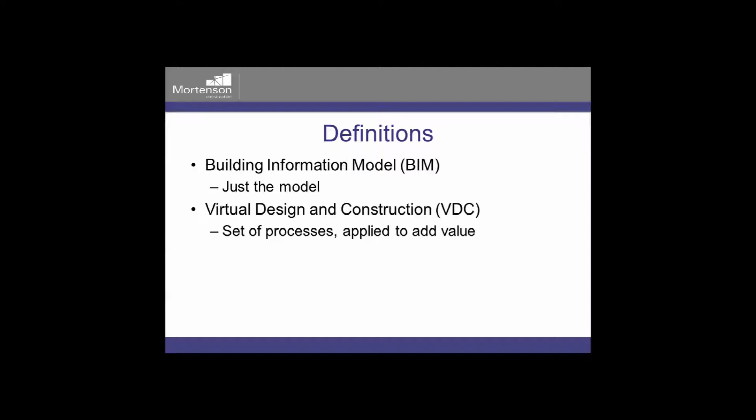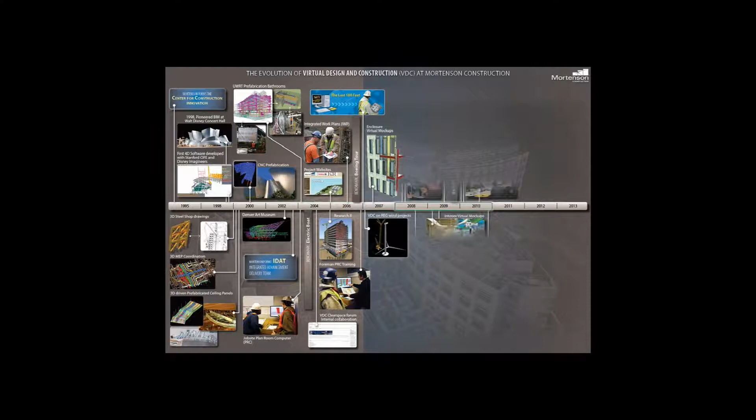Go ahead, Chris. It's Chris here. Just a brief intro here. You'll see as the slide builds here a timeline of Mortenson's processes related to virtual design and construction over the years. And it's really our philosophy, our approach, that the virtual design and construction processes utilize BIMs, building information models, but the value comes from the process, not necessarily the models themselves. The models are just a means to the end.

Here's a little background on some experience over time where we're trying to grow both our projects' utilization of virtual design and construction, and at the same time build the expertise and embed that expertise within our folks' skill sets. Here's a little more history, if you will, or some reference or guideposts as far as Mortenson's progression through virtual design and construction.

The area we want to spend most of our time on today is really acknowledging the difference between, quote, using BIM on a project and differentiating those various uses that apply value through virtual design and construction. That's that acronym again. This reference graphic here is from the Building Smart Alliance, and this was part of a project that Mortenson was a contributor on. Among others, there was a consortium of folks representing architecture, engineering, contractor, and the owner-operator areas of our industry. And this is really the framework that we use to create a frame of reference for the various uses.

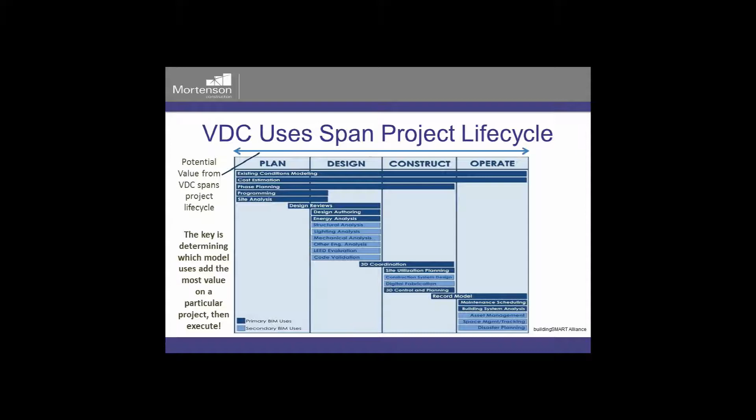The great thing about this framework really is that it provides some consistent nomenclature, and beyond just doing BIM. That was really a transition, and it's a paradigm shift here within the industry too, that as our firms in the AEC industry and then the owner, definitely the paying customer, get more versed in expectations that we're no longer just, quote, doing BIM.

An important piece of this is, like Mark mentioned, how all the parties contribute or inhibit VDC use to add value on the project. The largest way we believe to improve this is to acknowledge potential downstream uses for BIMs, for the building information models, early in the project.

So Mortenson's intent is to support the design and owner team to best deliver the value, and not necessarily be interpreted as, we're trying to define what the owner's needs ought to be. We're here to participate there and contribute and make sure that those are enabled. Likewise, with the design team, is it our intent to say this is how the designer ought to be using it? The point here is there's a dialogue and the framework really across the whole life cycle.

Okay, so when you're talking about quality in construction and specifically how Mortenson's organized, why VDC to quality? So essentially what we're trying to do with quality is we definitely have to control our cost. We have to mitigate our risk. It's all about customer satisfaction and repeat business. So we'll go on with the next slide here.

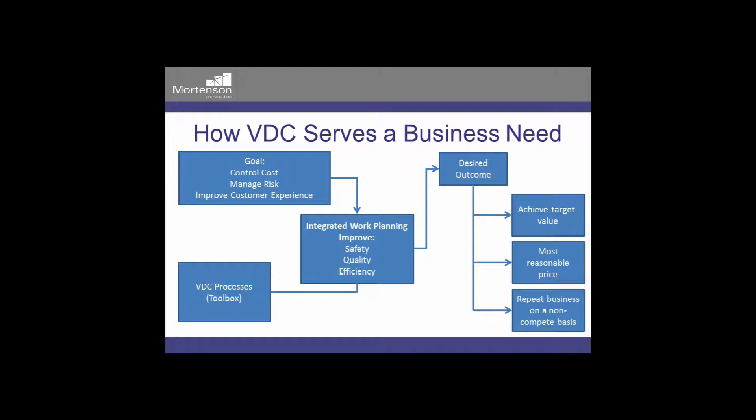So when we say we're going to do BIM, we're not just going to go out and model every job. We're going to identify what the specific needs are for the customer and the success of that project and go from there. Okay? So ineffective planning. I always enjoyed these types of photos.

Yeah, go ahead. Sorry, this is Matt. We just had a question before we get started with that. Mike McVitie was wondering, who within your team at Mortenson maintains the updated BIM for transference at the end to the owner for operational use?

As far as a person, it could vary within a team, but typically each project team has as a part of the team an integrated construction coordinator that is one of our professionals alongside the superintendent, project engineers, project manager, and so forth. But in a lot of cases, even that responsibility is a little blended. I've seen project managers take a leadership role there.

In some cases, right from the field, the superintendent is really the one that's the interface of that transition. Yeah, we typically have a lot of people that are utilizing the model throughout construction, but in terms of ownership, a champion, if you will, throughout the duration of a project, it's our integrated construction coordinators.

And then they may actually be taken off a project in the 70 to 80% range, and then come back on when we're doing transition to sustainable operations, when we're talking about delivering the model and the other closeout deliverables. The customer might get back into it just to make sure that that process is as smooth as it can possibly be. Does that answer the question out there, I hope?

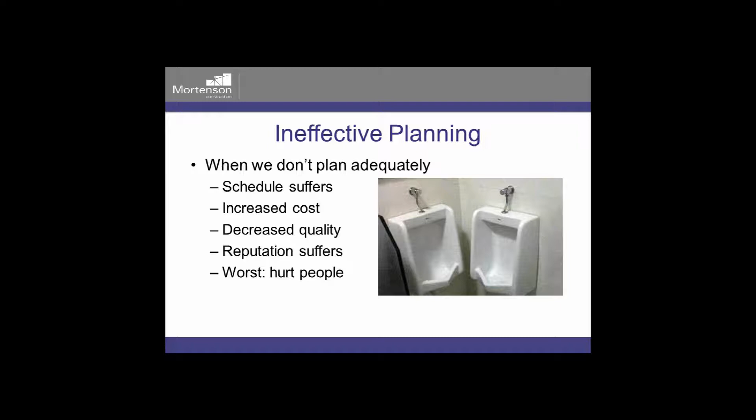Okay. So essentially, like I said, our strategy is developed around integrated planning, and integrated meaning it's not just us. We're involving all of our partners, from subcontractors and vendors to the design partners, even customers. So when we don't do that, of course, the schedule can suffer. We can have increased costs, decreased quality and reputation, and the worst case scenario is when we do ineffective planning, somebody gets hurt in the process, which we absolutely do not want.

Okay, so VDC is helping us be better planners. This is actually a photograph of one of our job site trailers. That's our project manager up there, cruising through the model. We're utilizing a smart board, and you've got our project superintendent there on the right and our quality manager on the left. And up in the upper left-hand corner is our ICC coordinator, then our two other project engineers. So this is an internal communication tool that assists us in developing better integrated work plans.

So of course you can see elements of the improved planning, increasing the predictability. We want to know what's going to happen, when, internally and externally, communication to the outside world, communication to the customers, especially when we're involving either adjacent spaces or disruption avoidance with occupied spaces. We need to know what's going on there, and managing those expectations. And as you'll see in the following slides, some elements of how we can utilize VDC and leverage it to make that communication clear.

Again, beginning with the end in mind, establish a plan, and control the perceptions. Value added. So we're not going to do something just for the sake of doing it. We're going to think in terms of the customer, what their desires are at the end, and utilize that. Okay. So how do we do that? Yeah, this is one of the most important parts. What we'll see frequently is so many things to pursue on a project, and so many things are important, and there's a natural tendency just to dive in and start creating content, the feeling of let's just start putting work into place.

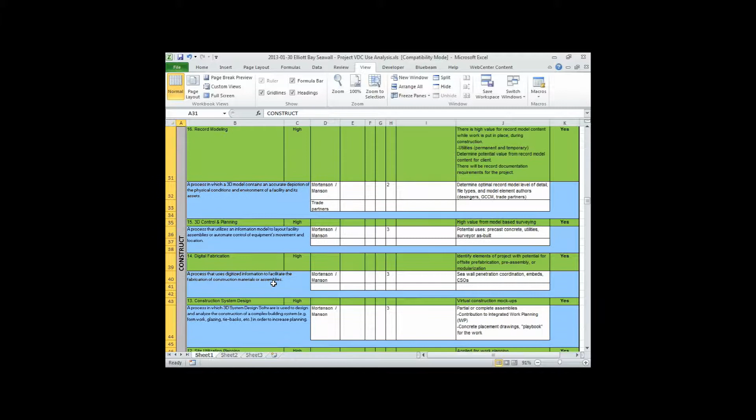Here's an example of one of the Building Smart Alliance templates. If the folks on the call are not familiar with it, I definitely encourage this. This is open source information from that consortium we were talking about that we think gives the best shot at leveraging common nomenclature for various uses and aligning a particular project's needs with these uses. So all the way from the operate stage, from construct, design, and plan, really beginning with the end in mind, what would the client, the most downstream customer, achieve value from?

Okay. And this is a really great tool, not just for us, but it could be a really great tool for specification writers when we're thinking in terms of interface with customers and trying to interpret what they want in the end, and trying to outline that so we can set the expectations up early in the design phase and get those written into the specifications.

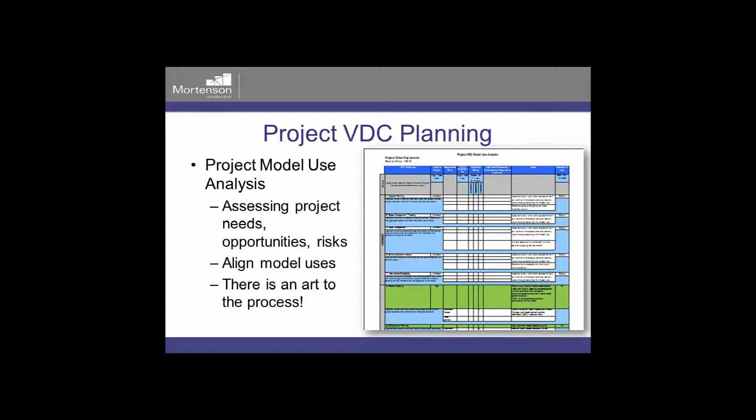The earlier the better, as we'll find out here in a minute. The next step after you've established these potential uses really is creating a plan that the team can utilize to agree on and go execute.

So there's definitely an element of model management between the various firms, designers, trade partners, the GC, CM. And the key thing that's happening here is we're establishing roles and responsibilities, schedules, milestones, all of the intricacies that have to do with model handoff and right of reliance. Those sorts of things ought to be determined and then established and documented within a plan.

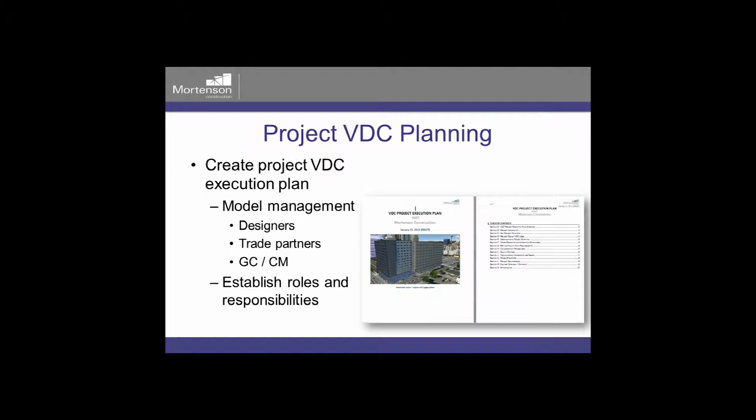Yeah, so it needs to be very clear on who's going to make the model, how that's going to be handed off, who's going to manage the subcontractors with their input, how we're going to do clash detection, how that's going to be delivered back to the architects, who's as-builting, and who's delivering the final deliverable back to the customer. So what this document does is basically, for all the parties involved, makes that crystal clear from day one. So we're not having these discussions as we go through on who's doing what.

Okay, integrated planning. So what you're looking at here is a phase plan. This is a structural phase plan for a project that we did in Billings. So this is typically how, if you guys have ever heard the term the last 100 feet, when we start to take this information from the model and actually deliver it to the foreman and the craft out on site, we translate this information down to, this is a PDF,

and it was actually an active PDF where we had a movie in there that showed our construction sequence, but it was very critical because we had some very critical leave-out elements to be able to get mechanical equipment into the building. So we utilize this format to actually communicate that. So we're also able to print this out in an 11 by 17 format that the foreman can take out and keep in his gang box so he or she understands what's going on and can communicate that to the craft on a daily basis.

So we cover safety and quality and, of course, sequence. And we utilize this information. This is extracted right out of the model. And I think we utilize Synchro along with this structural model so we can show the sequence of how this is going up. And like I said, we're able to embed this into a PDF element so we can email this to everyone and they can actually play it at their own leisure and see what was going on here. Other elements typically in here: who the players are, their phone numbers, other related plans associated with this, and that's it.

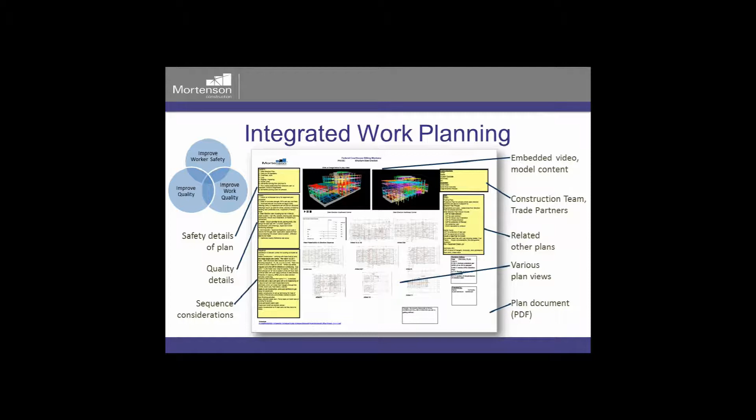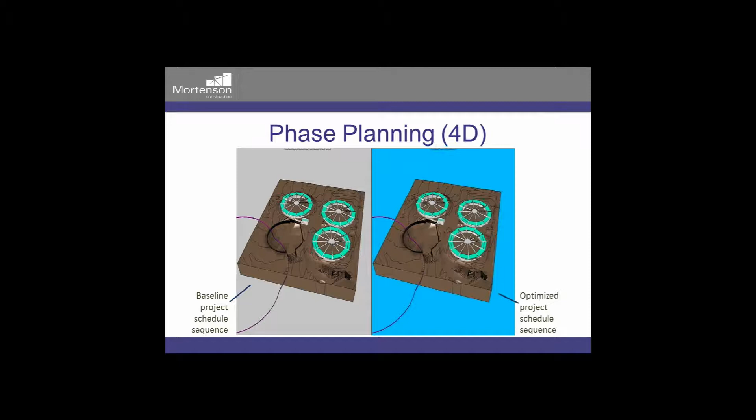And then we've also begun to incorporate 4D planning, and this is extremely critical on this particular project. You're looking at 3 existing clarifiers and a new clarifier for a wastewater treatment plant that we're installing up in Bellingham, Washington. The purple circle that you see there is actually a 100-foot radius from a heron's nest. Now, in order for this project to permit, we basically could not be performing any construction activities within that 100-foot radius between the months of January and April, which is the heron mating season.

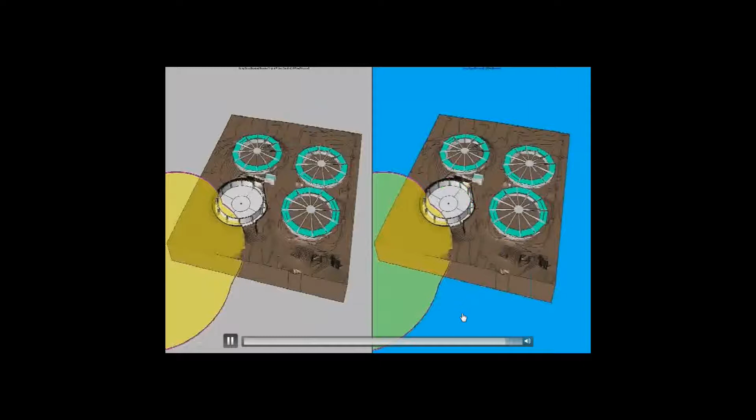So we had to basically prove how we were going to get this done, maintain the schedule that the customer needs, and be able to permit it through the Department of Ecology. So for those of you that know anything about clarifier mechanisms, typically you construct them from the center and you work your way out. So the model that you see on the left is actually how the clarifier was originally planned in the CPM. The model on the right is how we had to adjust it to build the elements that are within that radius first and work our way back. So there was a lot of sequencing and replanning to make sure that we were not within that 100-foot radius.

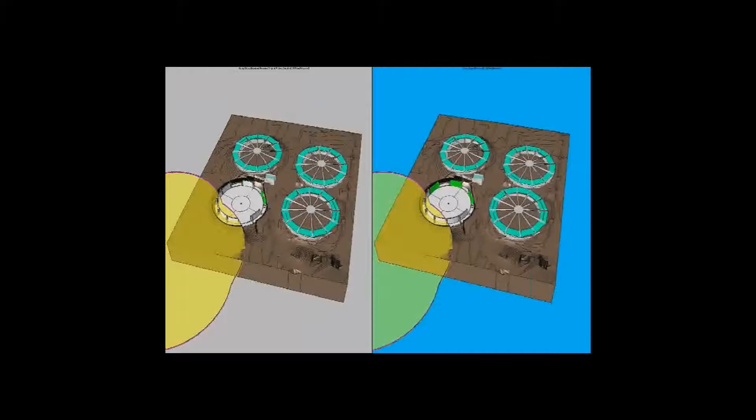So this was a communication tool. So we used BIM to leverage this with our project teams, our subcontractor partners, the owners, and the city to show them that we would get this done in the time frame allotted, so we're not within that 100-foot radius come January. Otherwise, we would have never permitted.

Okay. Another use and application of the intelligence and information that's contained within a BIM is its basis for cost estimating, also known as 5D. So the common nomenclature, of course, with 3D, the spatial attributes of a model element, and the 4th dimension, as Mark just mentioned, is adding the element of time and sequence, and then the 5th being cost estimating.

Here you see an example of model elements that are linked to cost assemblies, and model assemblies and cost assemblies together can be used as the vehicle, kind of the carrier for cost-related data.

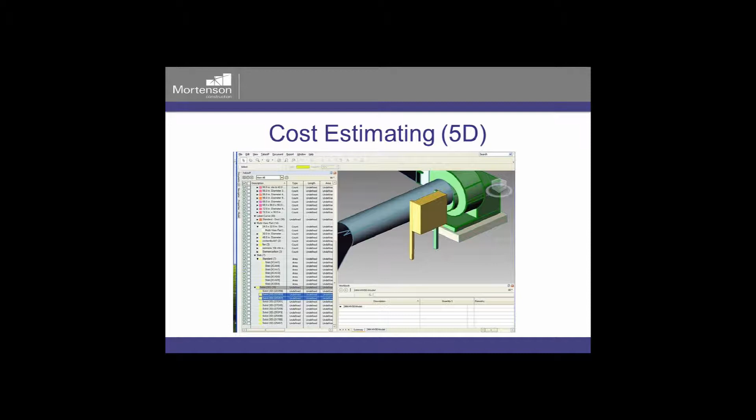This is extremely important because as the economy shifts, especially with our customers in the medical field, in late 2007, 2008, the model was let's build very large facilities and let's bring people in. But now as the economy shifts, in terms of scale, we're going into a lot of existing facilities and reconfiguring them. So this seems to be the business model now that's pretty typical for the medical industry right now.

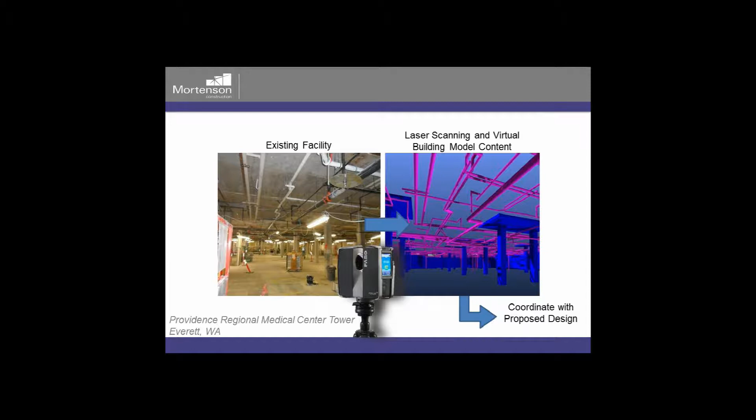So the ability to go into an existing facility that might be functioning above or below you, identify the existing utilities and design around that is actually incredibly critical to the schedule of the project. We have to identify where things are so we can design around them in order to maintain that schedule. So this technology is invaluable for that.

Here's an example of the graphic output that would come from existing conditions modeling and capturing the existing conditions within a space. This is a renovation example here, and the color gradation that you're seeing in the graphic is demonstrating the variation in the elevation of the floor slab, and you can see superimposed there the floor plan on top of the grades of color.

And the main takeaway here is that basically the bright green hues in this display were the design 0 for the particular floor. And what you see represented here is the variation of over 2.5, I think it's close to 3 inches total variation within this floor that by the naked eye you wouldn't necessarily see, but by capturing those conditions, you can really determine where you need to address some common construction tolerance in an existing facility.

So this particular area here, you can see telegraphing through the existing floor slab, the structure. So you can see where deflection has come into play here, and the blue would be lower, red higher than the design floor elevation. And in terms of managing expectations, our surveyor went in and took about 600 shots to develop this.

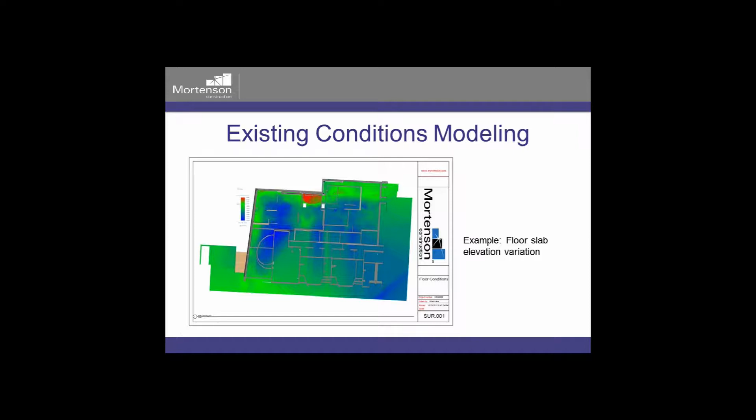And so you'll see how this spins off some other planning benefits as we go. So essentially we have a fully coordinated lift drawing for the foreman to utilize out in the field. We just extract that information right out of the model, put it into a format that they can readily understand, and we can easily do QC off of it and build from there.

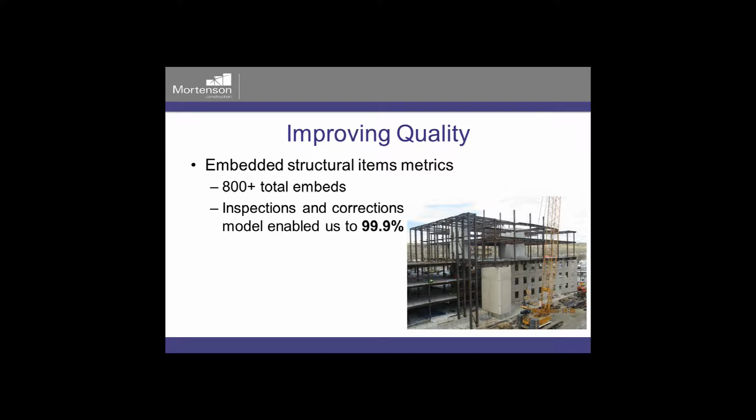Hey guys. Yeah, go ahead. Keep going. I have one comment from Michael White just saying that it was really great to see the floor slab elevation image that you had put up there. Additionally, Brian Lightheart has a question: was the CIP drawing example developed from a base model provided by designers or a model built wholly by Mortenson?

It was based on design model content, but given the level of detail that we need to show in the model, our drawings for placement are at a higher level of detail than the design model in this particular example. But that transition can be coordinated, and we've seen that happen at various points. In this particular example, I can give you a topic that's pretty frequent there. Maybe the design model shows a slab that's flat; the model content is completely level.

And in reality, in the contract documents, it could be noted to have a 2% slope, with an arrow showing directionally where the slope goes to a floor drain or what have you. Those elements are commonly not modeled with that slope in the design model at a level of detail, say 300, if you follow the AIA level of development scale model progression specifications.

So as a part of the execution planning process, the first step was we determined that there was a use and a value for coordinating concrete placement. And so this electronic lift drawing coordination process was enacted, right? So we proceeded there. The next thing was, great, where is the model content coming from? And to what extent can we rely on design model content?

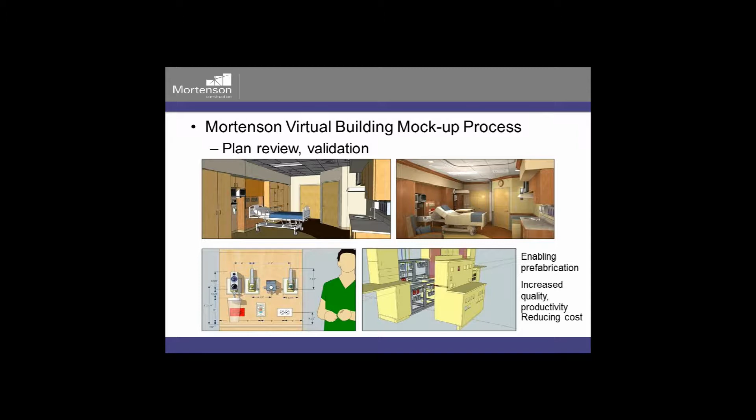It is an advantage, though, that you can go through and vet out where you may have additive tolerance situations. It's good luck when they cancel each other out, but you have to factor in when tolerance or the lack of it grows, and all of a sudden you've got compounding trades or, as you mentioned, dimensionally you could not align. I think we have an example of that coming up here on the spray foam. Yep.

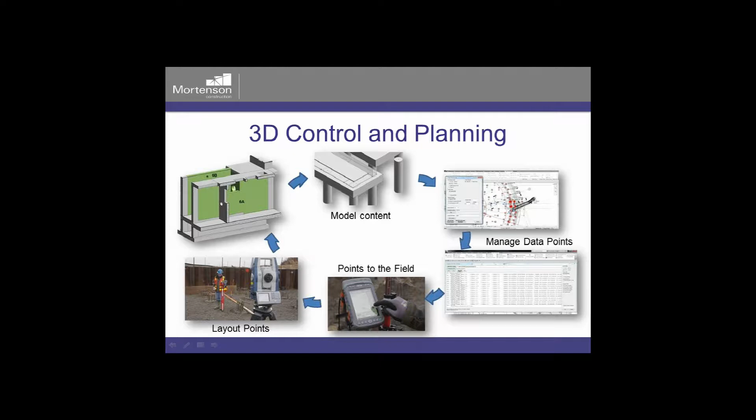And why is this critical? Well, clarifier mechanisms are filled with typically millions of gallons of water, and if our slab is too thin in an area, we can have a failure. So it's absolutely critical we get that right.

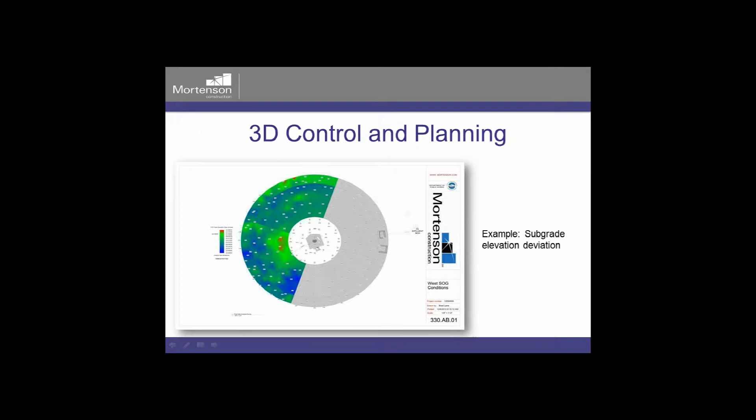Here's an example of an overlay of 3D coordination. One of the very first uses when folks were beginning to apply BIM to benefit their workflow, basic 3D coordination is still one of the areas delivering the most value on a project. If you don't get it right, then you really pay in many other places.

Combined with overhead 3D coordination, this is the Everett Hospital Tower, Providence, where you've got coordination also in wall and overhead support, and by system you can identify, manage, and really make sure everything fits together nicely.

Yeah, and clash detection, I'm sure most of you have realized, pretty much has paid for itself right off the get-go. So this is a pretty standard staple on our projects, even the smaller ones that are under $5 million. We're still utilizing this technology because it can be done quickly and effectively. And with 2 or 3 conflicts caught out in the field, this can pay for itself.

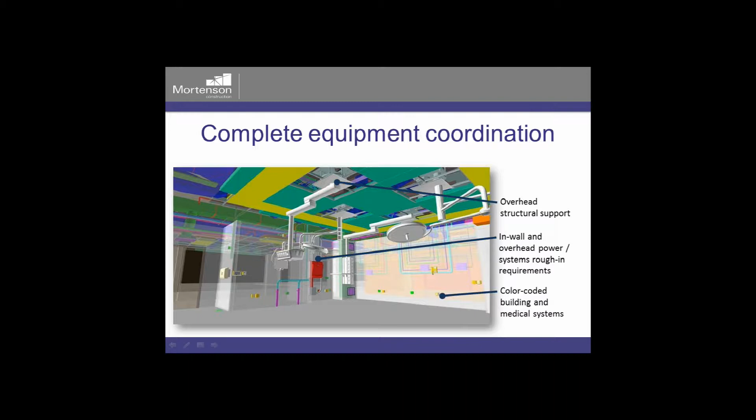With some of the design team on the call here, for sure, this slide shows a progression of how we've many times been able to apply the virtual building mock-up as a successful path in the progression from virtual construction. You manage it virtually to begin with, create a physical mock-up that is further reviewed and approved, and then finally you place the work.

So Beth, earlier you were asking about tolerances. This is a pretty good example here. Again, this is our Billings project, and what you're looking at on the left is a model. You can see the structural steel. Then we modeled the fireproofing that would go over the top of that. And the enclosure system on this building was a combination of rigid insulation and spray foam to be the air and vapor barrier on the backside of the precast.

Well, the spray foam has to be a specific thickness. And when we're thinking in terms of the detail where we're right up against the I-beam, the fireproofing on top, and the thickness the spray foam had to be to maintain our R value requirements, we determined with the tolerances in mind with the precast it was not going to work. So we had to change to the rigid insulation detail at those locations, and that's what you can see in the picture on the far right-hand corner up there.

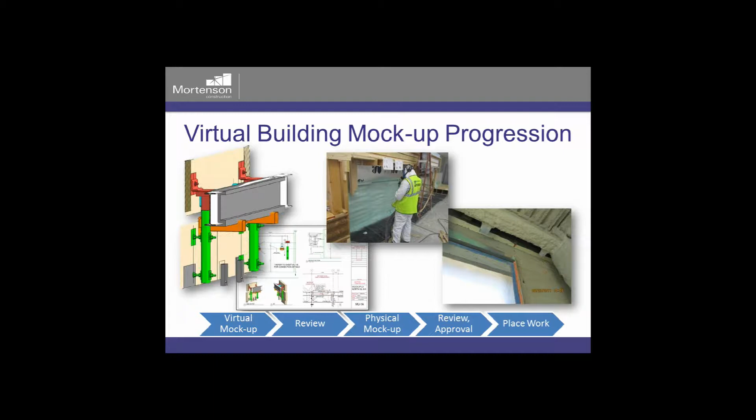So we actually went in ahead of time. We were able to figure that out utilizing this technology where we would have these tolerance conflicts and change the insulation detail in those specific areas. Because again, being in Billings, if we don't have the right R value, we have cold spots, and it's very evident in the product for the end user because it gets pretty cold there.

In summary, as we kind of button up the 3D shop drawing review process, this is essential for review up front with the end user, who often may not be able to interpret 2D plans, elevations, sections, and so on. And this in combination with virtual walkthroughs, and then finally perhaps a build out of a mock-up unit. Just another example of that.

Because in many cases they aren't set up to access the model, whether it be a technology barrier, training or the right personnel, or maybe it's existing facilities that aren't leveraging it already. It's a consistency issue more than anything in some cases, where other buildings or parts of a complex or institution are paper-based or 2D document electronic-based. And so finding that intersection to be able to hand off and then manage the data, that's definitely a dialogue that has to happen between owner, design team, and contractor to get it right.

So what we've discovered with this process is that now it's becoming possible. What we're running into, and I'm sure many of you are aware of, is facilities owners actually seeing the value in a model, what I call a smart model, that's loaded with all the equipment, operation, preventative maintenance, tasking, location, everything for every component that's out there. So of all the times that we've transmitted the as-built model over to the customers, are any of them utilizing it right now specifically for operations? No, they're not. What they're utilizing the model for right now is training and presentation purposes.

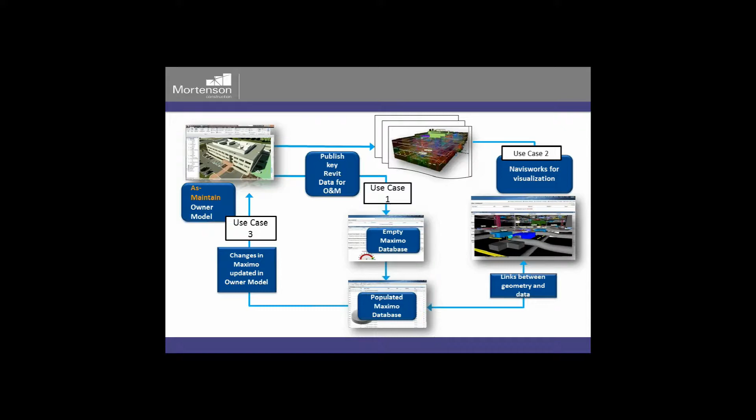Was that? Is that a question? Okay.

All of the businesses that run along the Seattle Seawall are going to remain open during the new construction of the seawall. They are scared to death about disruption and people not being able to access their facilities during the construction period. So we're utilizing a lot of these models. First of all, we utilized it to get the project, because we're able to show what our plan was.

Second, we're able to show it to these businesses so they can have a much better understanding of what's going to be going on around them, under them, and give them the confidence they need that, yes, we will be able to maintain pedestrian access throughout the duration of this project. So it was extremely critical for one, to get the project in the first place with the city, and then two, to keep the public interest at a comfort level where they should be.

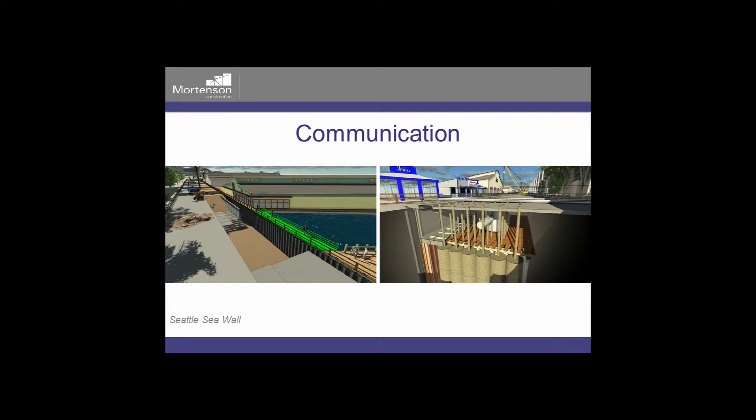The same communication applies also with our field folks. So Mark mentioned the last 100 feet. It's really an objective of Mortenson to make sure that we've got the right level of detail in the model, and also that it's accessible in the right way so that our folks in the field can apply it to deliver the value, and that we don't fall short on transferring that knowledge to the field. Worst thing that can happen is you've gone through the steps to create a great plan and you fall short because you're not able to communicate with the folks that need the information.

And it didn't take them long to be able to start doing fly-throughs and then go to 2Ds and print images of coordinated documents or as-built documents real-time, updated with the RFIs or the shop drawings. And then again, for our engineers to go out there and do the inspections for the in-wall and above ceiling prior to closure, utilizing this information in the field instead of bringing 10 rolls of drawings with them out there. So again, that's improved our efficiency and our accuracy out in the field.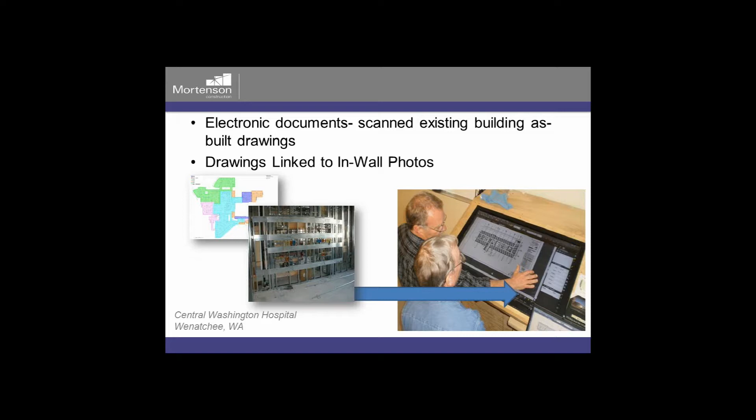So having photo documentation that's linked right into the model that he and his crews can find easily was the most important thing to him. So that's what we made into a deliverable. Here's an example of training videos for the facilities management team as well.

Okay, first-time quality, again, why it's so important. We're utilizing all of these tools that we've looked at to get it right the first time in terms of impact to the project, why that's so fundamental. Getting it right, of course, means delivering target value for the best price. If we're there with first-time quality, we're able to deliver the best product to the customer for the most reasonable price.

If our quality issues increase, we have event management in there. That's our inspection process, so that's essentially tracking our deficiency list. That's a trailing indicator that the cost and time associated with making corrections goes up. During punch list, the goal, of course, is to eliminate punch list. But the more of those issues that pop up in that third level, away from first-time quality, the impacts increase, the cost increases, the time increases.

With punch list, you're talking about the design team and the owner team stakeholders in that process, and you're wasting their time if we're developing tens of thousands of items on a punch list when they should be zero. And then, of course, when you get into the warranty, with the end users utilizing the facility, the impacts are most severe if we don't get it right the first time. If something comes back to haunt us, whether a leak or something failing or not meeting performance requirements that we should have determined through the inspection process, those tools enhance that.

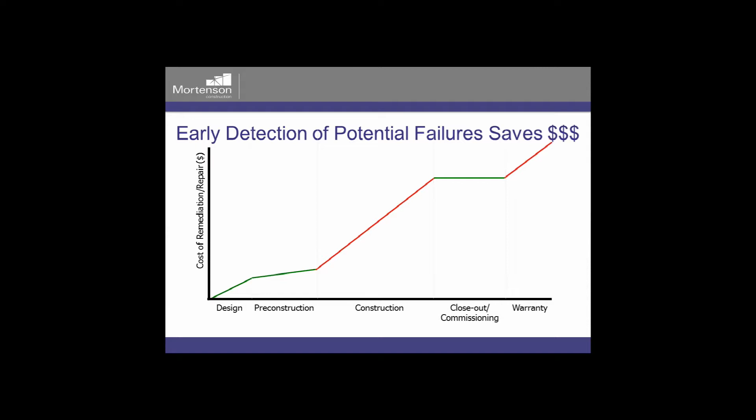And you can see that here on a scale of cost and time. If we find these issues in the design phase, when we're doing the coordination and clash detection, the cost and time associated with them is minimized. As you get into the construction, closeout and warranty phases, the cost and time associated with making revisions increases exponentially. So it's extremely important to capture it utilizing these tools as early as we can in the process.

And again, thinking with the end in mind, thinking of the next project, thinking of that happy customer, consistent with our business model. We're not out there in the hard bid world. We're out there to develop relationships and repeat business not only with our customer and our facility partners, but our design partners as well. So planning begins with the end in mind. If we have the right tools and we execute properly, we make for a much smoother project, and that sets us up for the next one. It's all about getting the next job.

Folks, that completes our presentation here, and we can take some questions now. All right. Well, we have a few questions here for you. One of them is just clarifying. Sheldon was wondering if maybe he missed it throughout the presentation, but have you been using architects' models, or have you been creating your own models from the prints?

We do both. And in certain areas of a project, where we acknowledge that there's an opportunity or a risk that we're trying to either keep from happening in the case of a risk, or mitigate, or on the opportunity side, we're trying to make sure that we realize the opportunity. There's definitely a conversation that we have with the design team, and let's just say that we'll never turn away design model content, and we'll take as much as we can; the more the better.

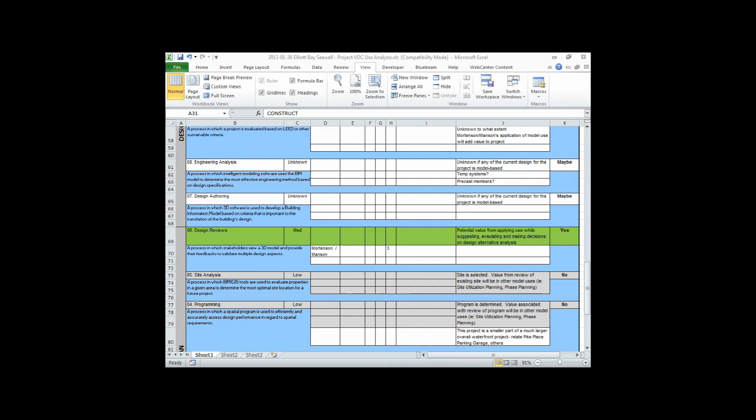All righty, we have another question here from David. Are you using coordinated documents such as your steel embeds in the field? Question is, do you submit the design team traditional shop drawings of a limited scope, or after you combine into a composite installation document?

I think it's a little of all of those. It definitely is the last one, where it's a comprehensive design document. I shouldn't say design, it's a construction-generated document, but we look at it like it's a 3D shop drawing. It follows a very similar review, except it's enhanced with the benefit of some 3D capabilities. The parametric modeling that we mentioned, carrying a pipe sleeve with the pipe, also with its layout information.

And I think it also depends on the sophistication of the vendor that we're working with. From our steel suppliers, if they have the sophistication to actually utilize this technology and put it in the 3D shop drawing format, and if the engineer is happy with that, then we'll go that route. Otherwise, it'll be the traditional 2D drawings, get it approved, and then we build it into the model, which is what I would say we do about 50 to 60% of the time right now still.

I remember a win that could be a good example of this, where the shop drawing review process was for fire sprinkler review, and the engineer of record wanted to review coordination and sizing and so on. So they were attending remotely big room meetings, as we call them, where you get the various stakeholders involved, either in person, ideally co-located, or if they're in another state or the other end of the country or world, in a GoToMeeting or GoToWebinar environment.